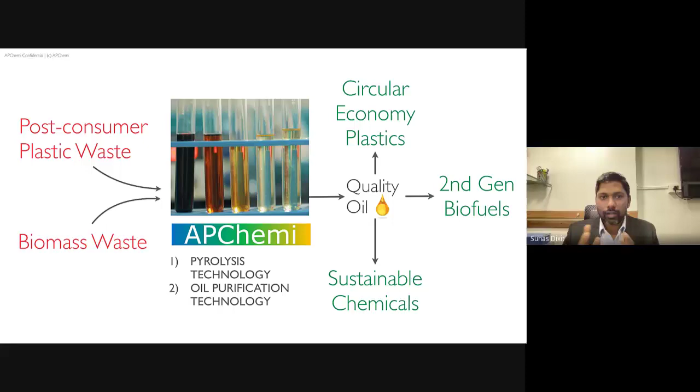We present the opportunity to create value from plastic waste and biomass waste, and we're supported by ecosystems of Shell, Alliance to End Plastic Waste, KPMG, and startup acceleration programs of Malaysia as well as Indonesia. Our vision is to unlock global production of biofuels, circular plastics, and sustainable chemicals through pyrolysis and oil purification technologies. Our efforts in this field are recognized by KPMG and others. Our technology and business model is to convert plastic and biomass waste into the required quality of oil for downstream production of circular economy plastics and retail blendable fuels. In some countries, fuels produced from plastic waste are also recognized as biofuels, as well as sustainable chemicals.

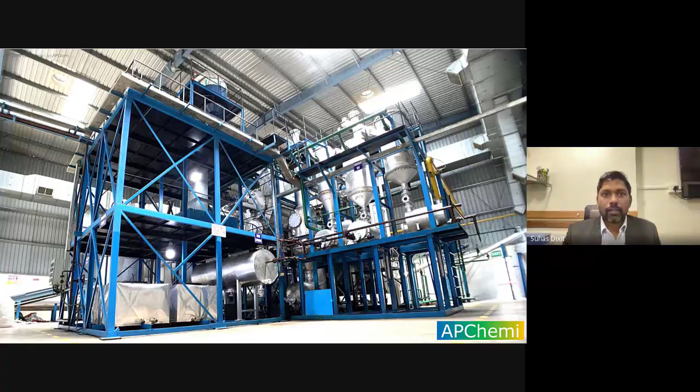So since 2007, we have tested, operated, and perfected our technologies. We've proven an end-to-end solution for plastic waste to oil, and biomass to oil, starting from equipment manufacturing, installation, commissioning, technology licensing, as well as oil production.

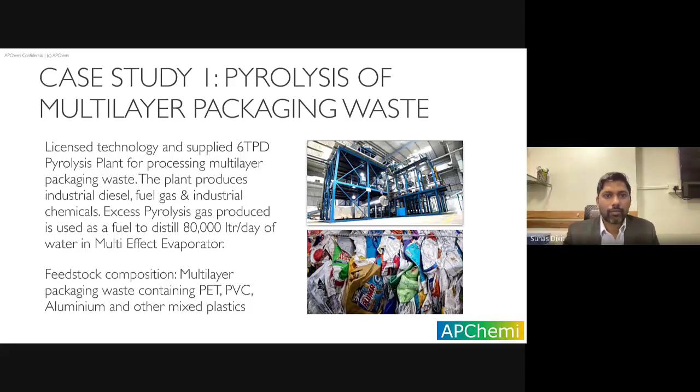Just to discuss a couple of case studies, we have converted multi-layer packaging plastic waste into high-quality oil, like your snack packets or chips packets, which are multi-layer packaging with 3-4 layers of plastic with an aluminum layer. We can take that and convert it into high-quality oils and chemicals. We can also convert typical post-consumer plastic waste into high-quality oils and chemicals.

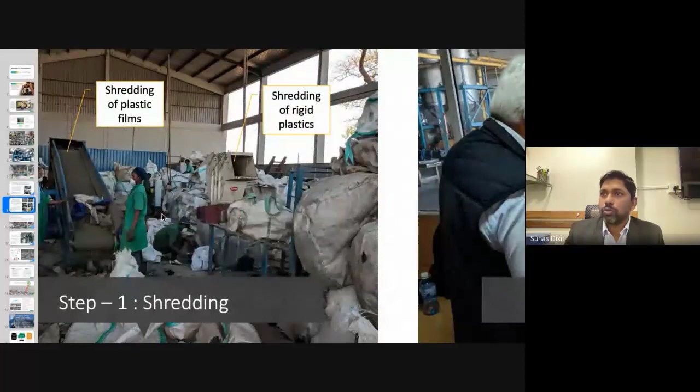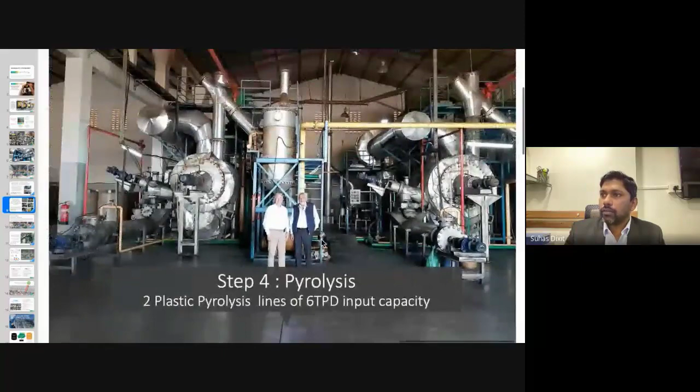So just to zoom in a little bit, this is the quality of plastic waste that is coming in from landfill, and then it goes through these shredders to do preliminary pre-processing. This is how the plastic waste from landfill looks like after shredding. Then it goes through these kinds of plants that we had supplied, and gets processed in the SCADA operated process plant to produce this quality of oil without use of a catalyst. So this is one of the things that we had done.

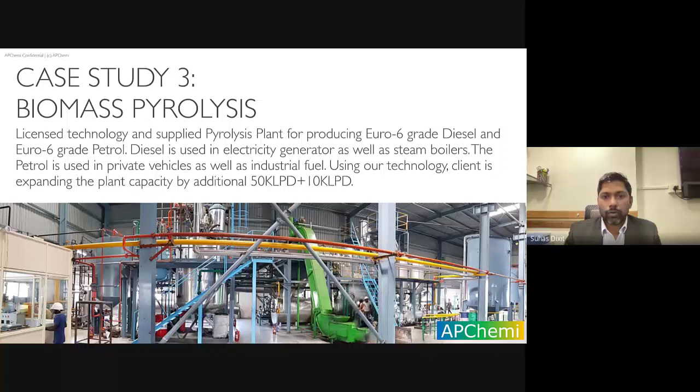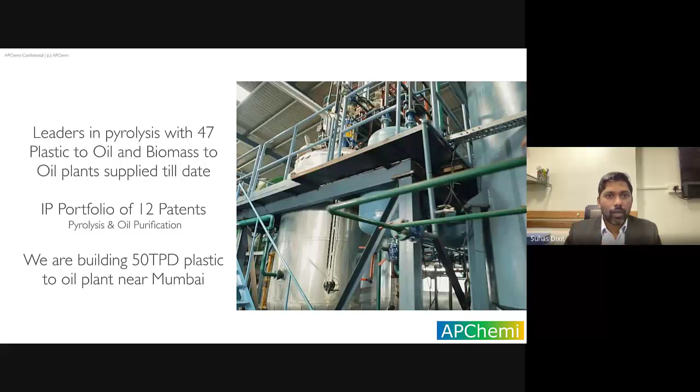We have also converted certain post-industrial biomass waste into Euro 6 quality petrol and diesel from biomass waste. We are leaders in pyrolysis, EPC, EPCM, or turnkey contracts, with 47 plastic to oil and biomass to oil plants supplied till date. We have 12 patents in the domain of pyrolysis and oil purification, and we are building our own 50 ton per day plastic to chemicals plant near Mumbai. We are exploring synergies with global corporates. We sponsor research at the Institute of Chemical Technology, and we have sponsored PhD chemical engineering research students there. Our global clients include Equate, Unilever, Uflex, Amcor, and Shell, among others.

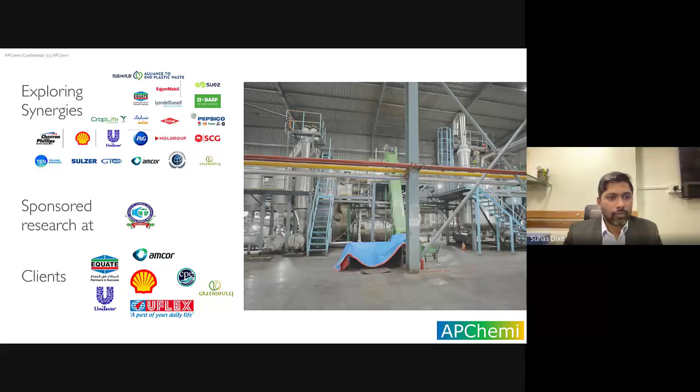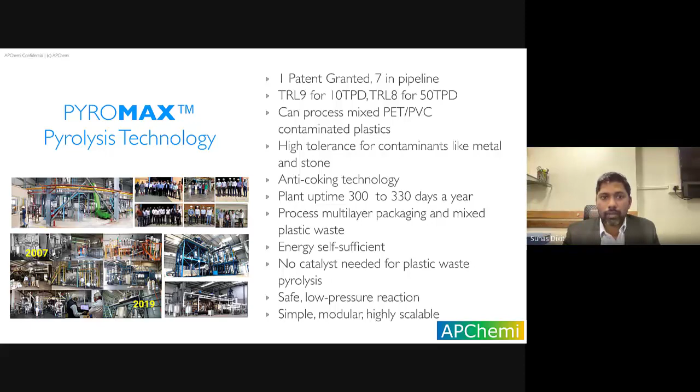Just to pictorially show what our technology is capable of doing: if you convert plastic waste into oil using pyrolysis alone, that doesn't produce very high quality oil. That oil has impurities of sulfur, oxygen, nitrogen, chlorine, and oligomers. So with a combination of our pyrolysis and purification technology, we are able to produce high quality oils from plastic waste that can replace, say, crude oil or naphtha in refineries to produce feedstock for chemical recycling of plastic waste. We have both pyrolysis technology as well as oil purification technology. This is a patent granted oil purification technology that we have.

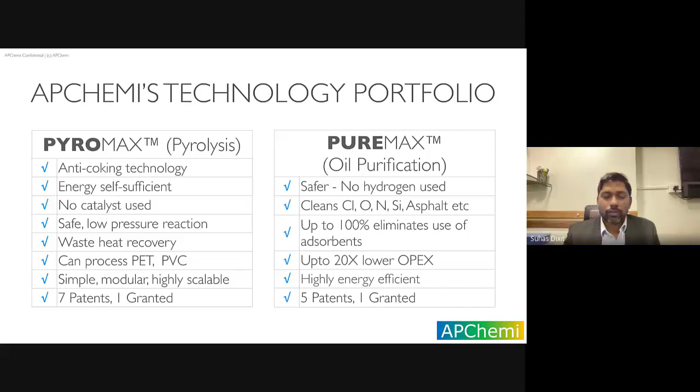Just to talk about the team, I have 12 years in pyrolysis. I know what works and what doesn't work in pyrolysis. I take initiatives in both business development as well as R&D. Vijay heads engineering management with over 40 years experience in EPC. Aruna has over 15 years of experience in operations. And our team is also blessed by advisors like Adam Nandakumar or Rakesh, senior petrochemical professionals. We are also mentored by acceleration programs of Shell and Alliance to End Plastic Waste.

And the question you asked was, how do process plants come up? How do we start and set up a complicated chemical process plant to convert plastic into oil? This is the typical project approach taken up by the process industry.

You start with a pre-feasibility study, which includes raw material due diligence, an opportunity approach paper, and regulatory review covering what environmental clearances are required and so on.

Then you do a feasibility study, which involves front-end engineering design, which can involve maybe 15,000 to 25,000 engineering man hours, plus safety studies. Then you go into detailed engineering and EPC, EPCM, which kind of go together. And after the plant starts, ongoing support is also required.

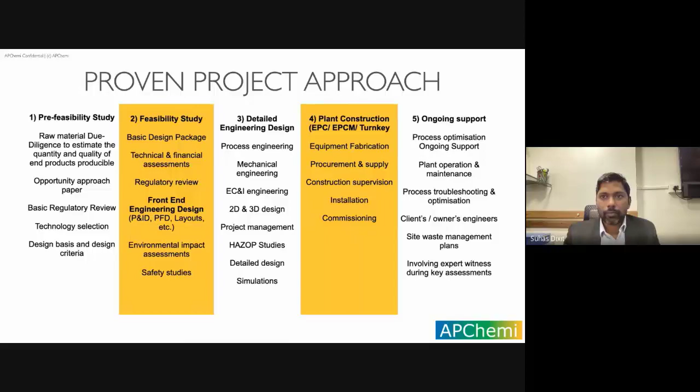So it is an extensive process to come up with a chemical process plant, and we work closely with our clients or partners to make this happen.

Coming up with a chemical process plant is quite a rigorous engagement. You're looking at anywhere between 20,000 to 50,000 engineering man hours for these kinds of plants, and there's a lot of work put together to get every nut and bolt of it right.

We've set up 47 plants till date for people. We have supplied 47 plants, and now we are in the process of transitioning our business from only supplying plants to others, to also building our own 50-ton-per-day plant near Mumbai, for which we are raising project finance. Greenfield projects like chemical recycling of plastic are quite a challenge in territories like India, but yes, we are reaching there.

Most of the plastic waste is post-consumer — used by consumers, and then it goes to material recovery facilities. It comes from there, or it comes from the reject of mechanical recycling.

I also talked to other groups doing work to clean up the oceans and the ocean gyre. Would you be able to work with collection crews who pick up plastic and deliver it to your plants, or does it need to be a certain type of delivery? We have processed river plastic, beach cleanup plastic, and ocean-bound plastic. It's actually a little better quality compared to post-consumer plastic waste from material recovery facilities in certain regions of the world. But yes, it can be processed.